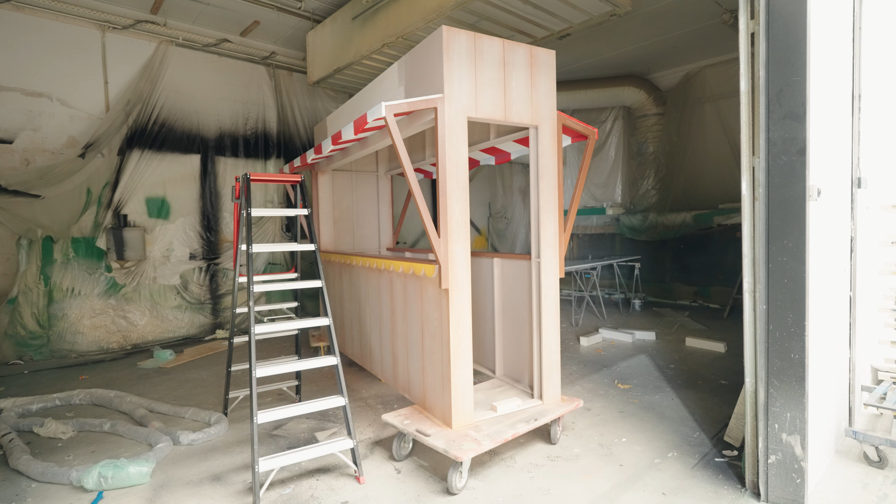When I started the company, I was 20 years old. In that time, we worked more for restaurants and bars, which needed a certain kind of ambience, a certain kind of theming, which was normally not done by interior companies. So we came up with these crazy sketches, go to a bar owner and said, we can refurbish your whole place. And then somebody introduced me to the theme park industry, actually.

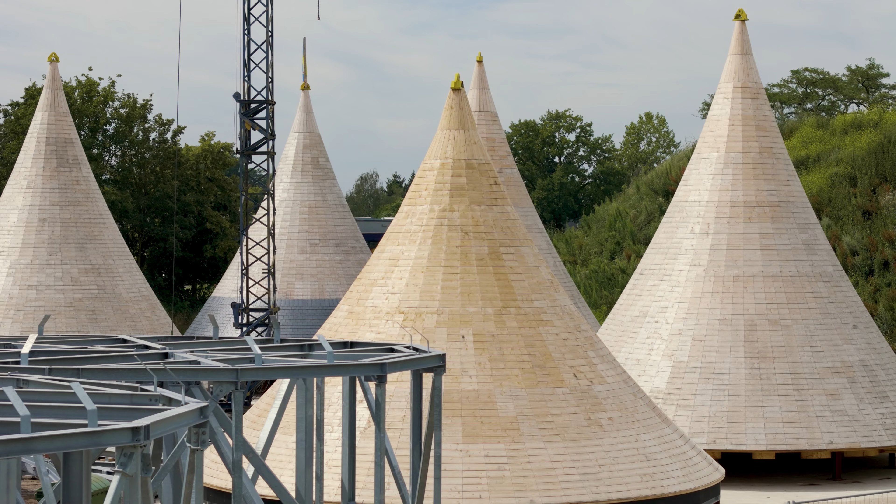And that really opened my eyes. I thought, wow, I can do much bigger stuff here than I do for these restaurants and retail stores. That is really interesting. So I started to pursue getting jobs from amusement parks and theme parks. It has always been our goal to go into projects and make more out of it than everybody could expect.

Things come alive because it's not only producing theming and decors here, it's also integrating media, light, sound, smells. So the whole atmosphere needs to be right.

We're not only technical designers within the company, there's also graphic designers and visual designers. And then we all sit together and we brainstorm on whatever the assignment is. Then the visual artists will start sketching out things. We, as technical designers, will set up 3D models as volume studies.

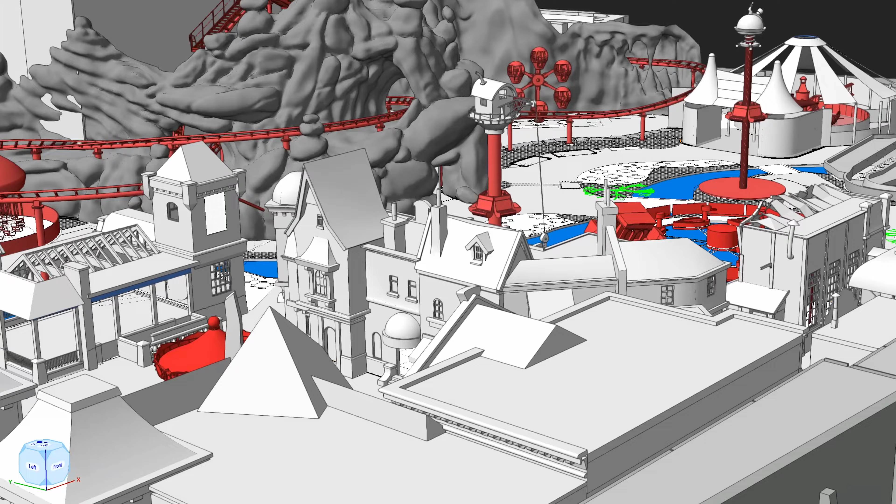By the end of your concept design, you have sort of tested it by putting it in 3D and making floor plans and some first models. We'll start making detailed drawings of every wall, every floor, every ceiling, and then we'll start putting material codes, color codes, so it's super clear what the final look is going to be. And we will present it to the client.

We know that we can also make it for the budget they have provided us. We also collaborate with multiple partners, but also in-house with different departments. And for that we use Vectorworks to put all of the puzzle pieces together. Yeah, it's one giant puzzle.

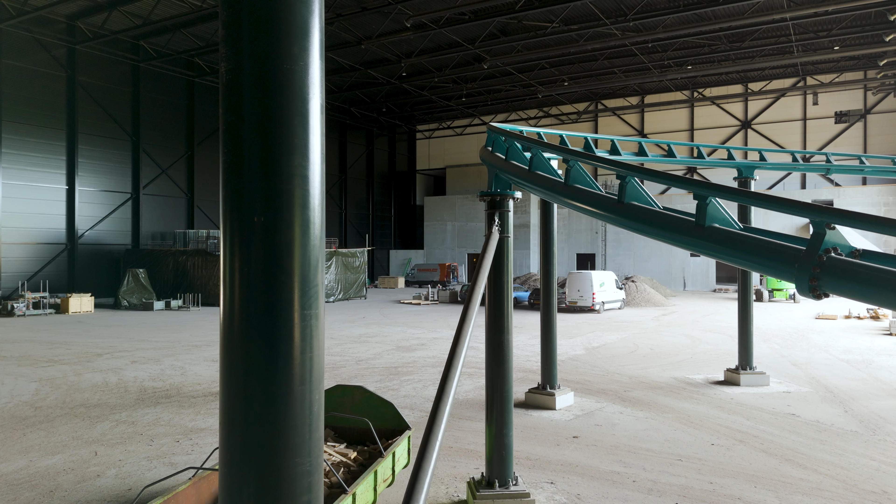Internally, we all use the same program, so that makes it very easy to work together. So we have sort of a central hub there. We're very flexible with whatever they send us. We can export in many different formats. The client, they can pretty much send us every kind of file type. That data can also all be loaded into the Vectorworks model.

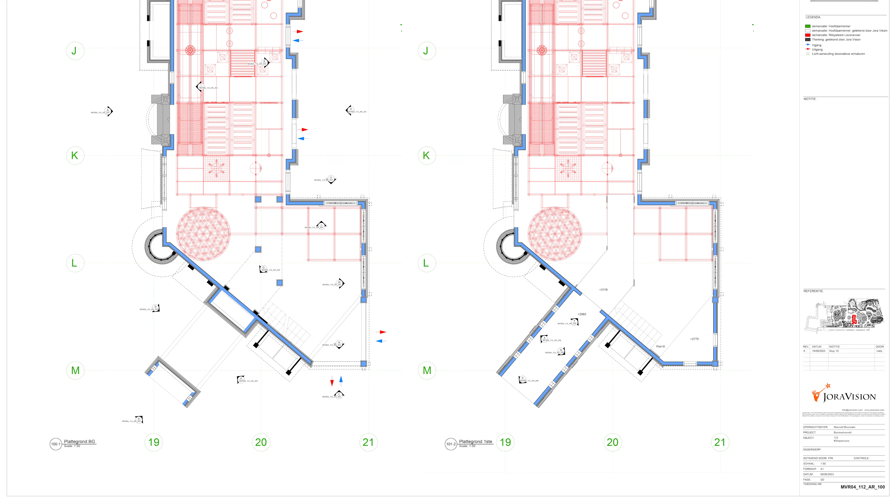People work in such nice harmony together that they motivate each other to get even much more out of the budget or out of the design by adding that little extra. The main reason for us to switch to Vectorworks is that we could have 2D and 3D in one program. So whatever we model in 3D, if one of my colleagues says, I need a floor plan or I need a quick elevation, that's very easy to do now.

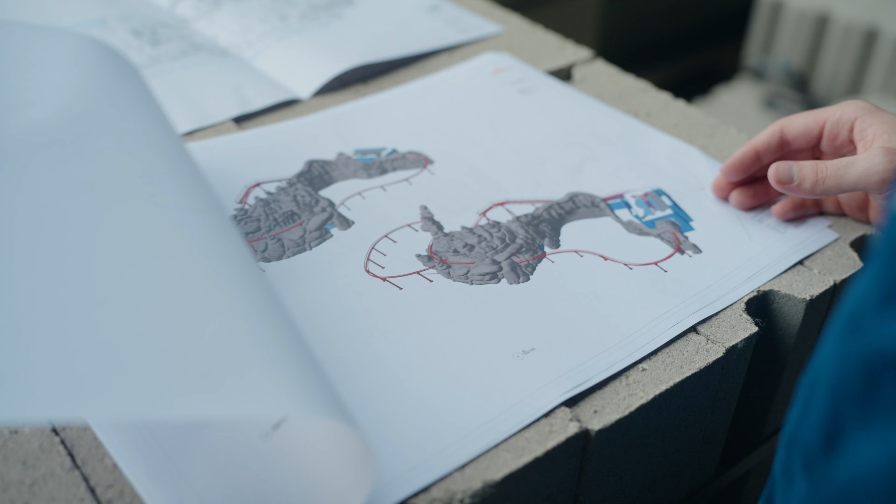During the production, if we have any problems, we can easily go back to our designers and say, hey, can we solve that in a different way? We extract all sorts of documents that will better communicate with people that maybe don't have the same vision, but they are very important because they are the ones who need to understand the designs to be able to build it.

If you look at Vectorworks, it was actually a choice we made to transform from another big brand to Vectorworks a couple of years ago. Since that time, I think it really sped up our whole design process.

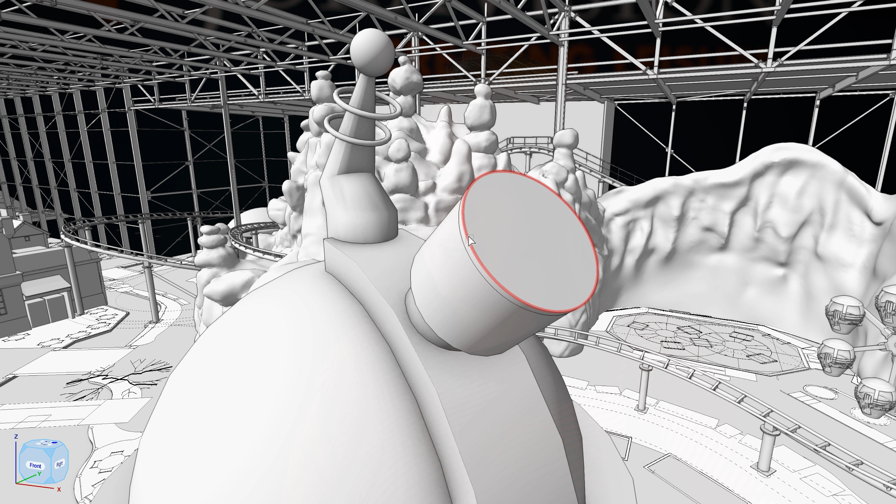At the moment, I'm really a fan of all the sculpting tools because for a project I have to design this weird shop that has all sorts of crazy elements on the outside. We have to make those. So if I want to make a wonky tower somewhere, or a slanted roof with crooked poles underneath, I would have to hand draw this. So that's what I'm trying to figure out at the moment. And it already starts looking really nice.

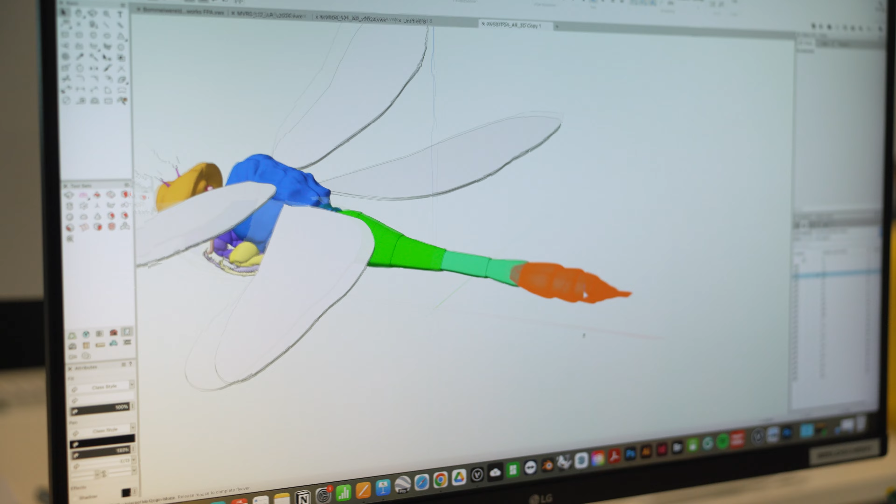For me, smart work tools are all sorts of tools that Vectorworks provide me. The subdivision tool, for instance, is a great way of modeling organic shapes, but still have full control of their dimensions and be very accurate with the end result. Another tool that I really like is the deform tool, because most of the times we start with straight objects, let's say a roof or a wall, and later on we can easily deform it.

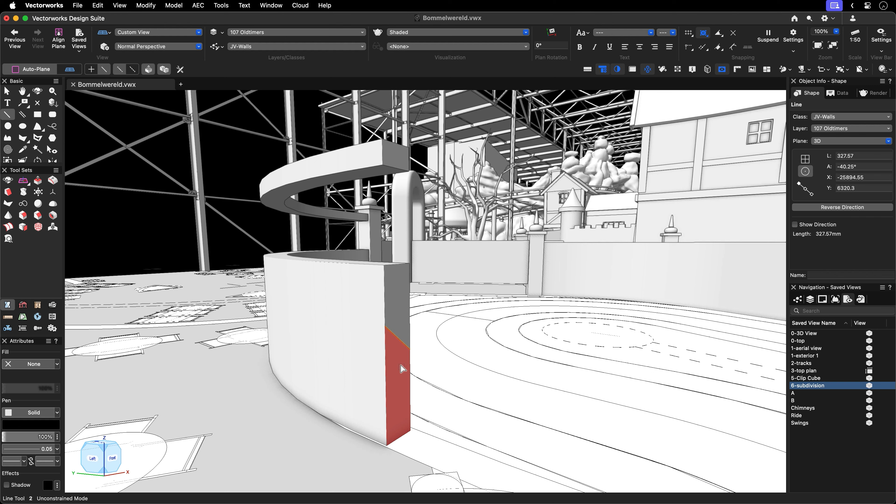We can predict or simulate how that building would age. And another thing that is very convenient for us is that we can always go back inside the model and take some steps back in case there's a change.

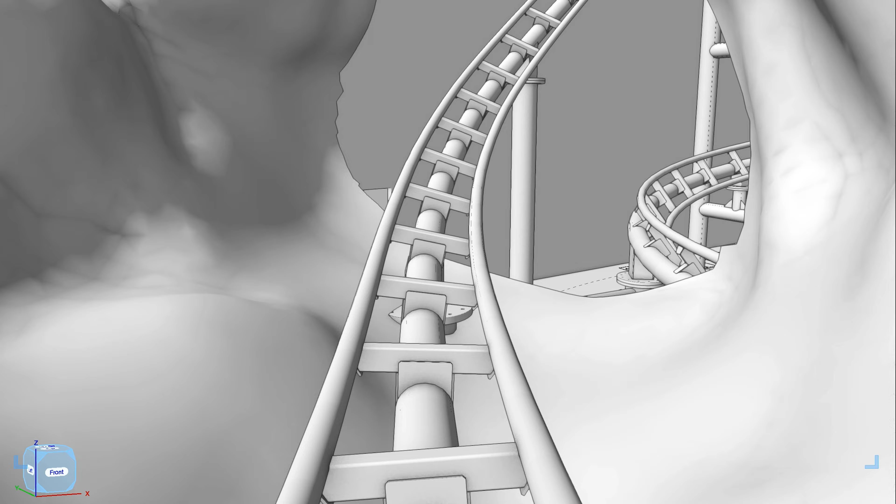We always say here, we make an artist impression, we show it to the client, and then at the end of the road we take the same artist impression and we look at the project, is it quite the same? Perfect, good job.